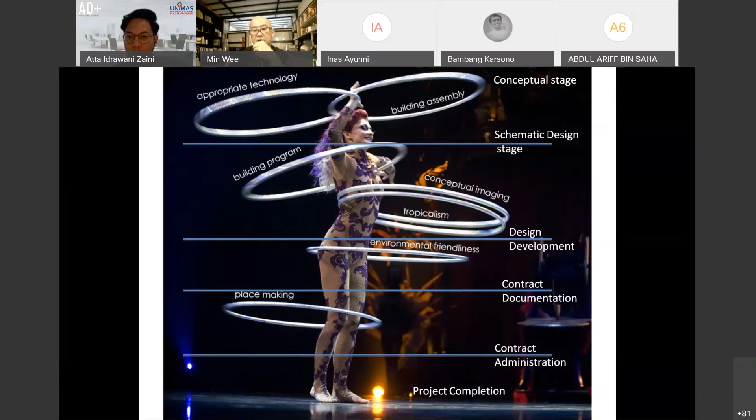I thought that perhaps today I'll talk about just four of these preoccupations that I have, so that they can maybe guide you guys in how you can talk about your design, how you can start, how you can develop, and how you can end, so that it becomes part of your project submission.

So maybe we talk about the first one, which is the threshold. Why is it important? It's a very strange thing to talk about, but I'm trying to relate this to our culture, being Asian and being in the tropics.

This is basically our culture, being in Asia. What we do is that when we enter a house, it's very normal for us to take off our shoes. That's something local to us, unique to us, part of our culture. The raised doorstep in a Chinese building is also part of the culture. So one is physical, the raised doorstep - the other one is cultural, it's social. You don't see it, you hear of it, you practice it. But we can use it to delineate between the inside and the outside.

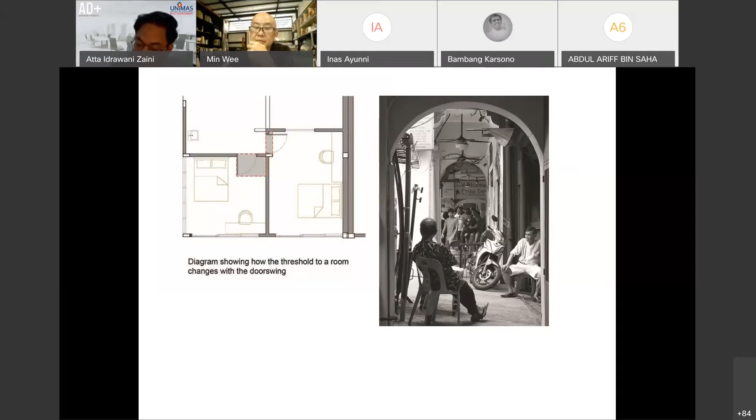So I use this building as an example of what a threshold could potentially do to a building. This is a building restored by us. It was built in 1963 and served as a municipal council for many years. Then in 2004, we were told to change it into a little museum on the first floor and to have shops on the ground floor.

Those of you from Sibu will be familiar with this project. When we did it, we also did a diagram. This is like the kind of stuff that you guys in second year and third year do - a site forces diagram. You look at site forces. You see the red square there - that's where the building is.

Then you notice they've got two important streets, one on the top, one at the bottom. So this building doesn't really have an entrance because all the development in the area has taken away that sense of entry. It used to be from the north, where the multi-story car park is, but someone from the authorities decided to put a multi-story car park there, which took away the sense of entry for that building.

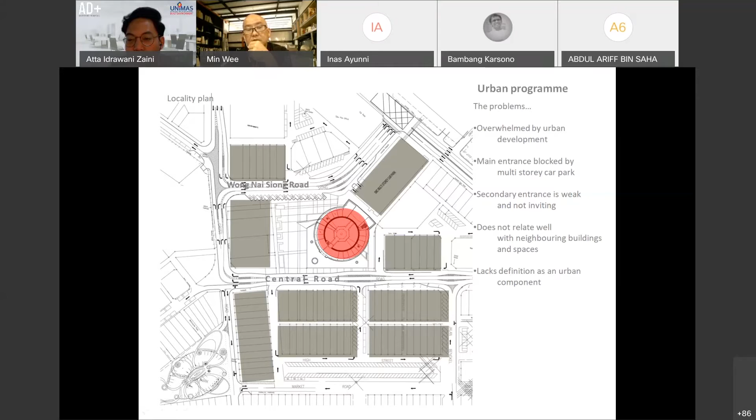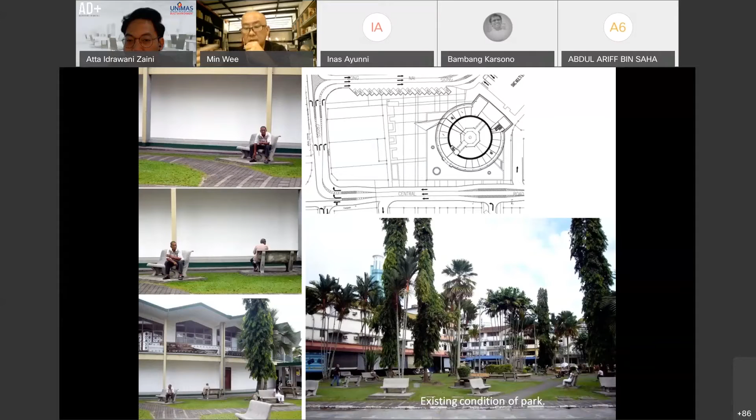So we needed to create another one. We asked the council, can we use the park as part of this entry space to create a forecourt? Essentially it's creating a threshold from the street before they enter the building. It's a preparatory space that prepares you for visiting the museum. It also enables us to define the edge of that building.

You see the red square that's around it now? That basically defines the compound of this heritage center. So whether you're coming up from Wong Nai Siong Road or from Central Road, whether on foot, by car or by taxi, you enter the threshold first. The threshold is the green space, the park that we've taken over. It prepares you, it tells you that you're going to see something interesting, then it tells you where to enter the building.

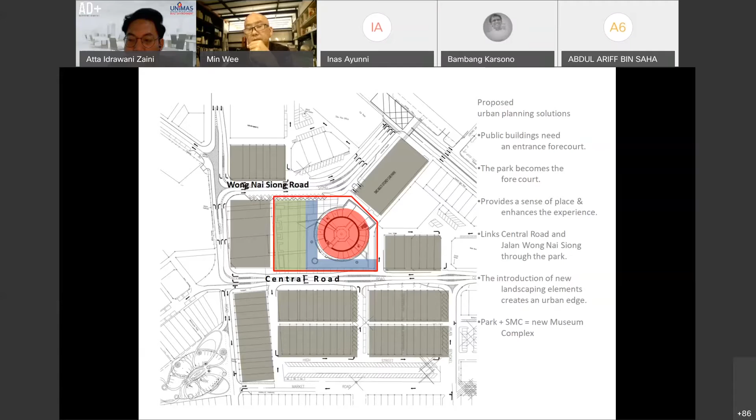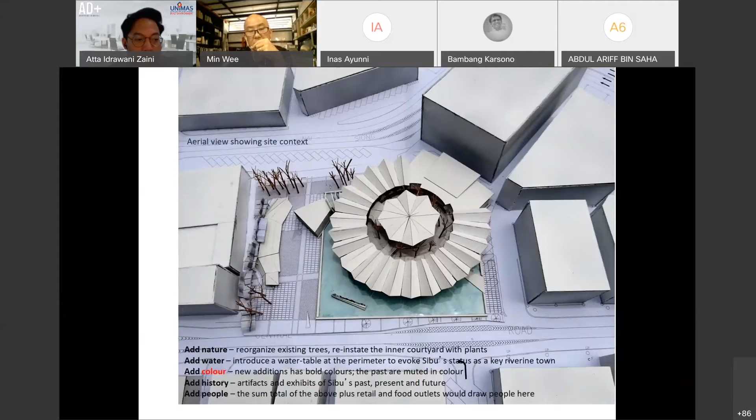Now, because this is a circular building, it makes it quite hard to tell people exactly where to come in. So when we presented this scheme to the mayor in Sibu, we told him we're going to design a big funnel that sucks people into the center of the building. I think when we were presenting, he thought we were speaking as a metaphor, maybe some sort of electrical device. He didn't think we were going to design something that is physically a funnel that sucks people in. But that's what we had in mind all along.

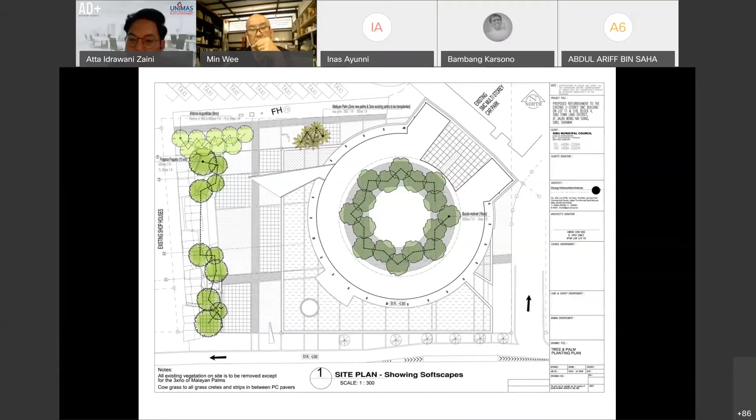So this funnel was an intervention into the existing fabric of the building. We also put a water body around this circular building. What does this do? It basically allows us to control how people come in and out. Because there's water here, you cannot simply go wherever you want - you have to come through the park and then enter through the pool. So the water becomes a device to enrich the space, and it's also a device for traffic flow.

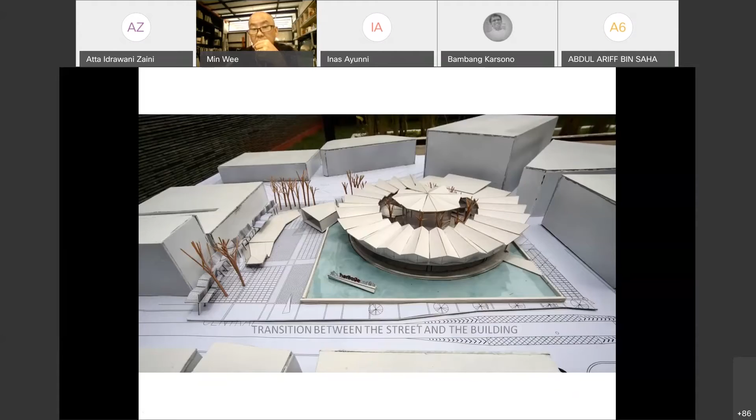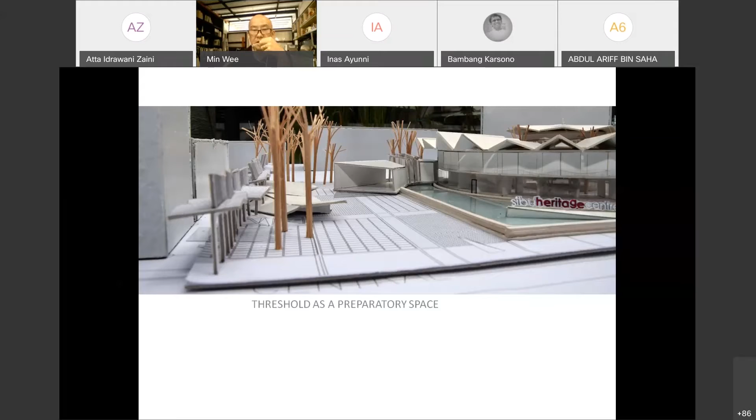So we make these models routinely in our studio. Some of you in year one, we talked about the idea of a sketch model - this is an example of a sketch model that real-life architects do. We build this, take it apart, and change it. It's not very pretty, but it's to scale, and it's useful for us to get a sense of space and how things sit together.

So when you look at this now, eventually you see how it gets built. You can see the funnel transforming the look of the entire complex. Instead of a circular building sitting quite lonely in a park that's not related to it, now there is some symbiosis in how the building should be entered. You get off, you walk through the park, and you enter this threshold - this big funnel that basically guides people in.

Now the threshold, the funnel we designed, isn't simply some funky thing to look cool. We picked up clues from Sibu as a town. Sibu is a shipping town, a riverine town with life around the river. It's also a town built on timber logging, so we wanted to clad it in timber. We wanted to allude to the jetties, like when you get in and out of a boat. So the inside of the funnel is a little bit like the ramp you use to get in and out of the ferry - rough timber planks that make you enter through the space.

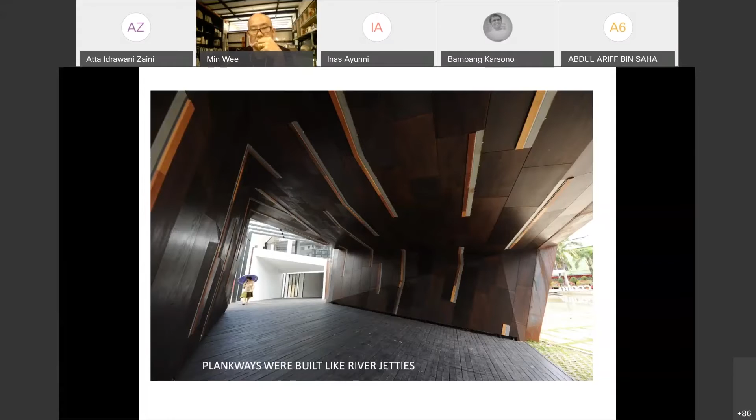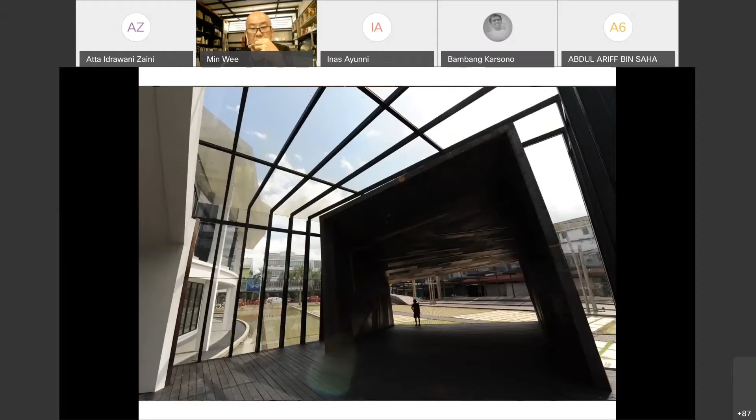You enter, then it sort of prepares you. You come in. The other thing about the threshold is that you can see from this photo that you're getting out of the heat before you enter into the aircon. There's this space that allows you to cool, allows the sweat to dry off a little bit, then allows you to get ready. Then you come in some more, and once you get through the funnel and enter into the building, you know that you are there inside the building.

This funnel is like a snake. It sort of insinuates itself, becomes a floor. It's also part of an exhibition space, allowing you little glimpses into the courtyard. You see how it pushes itself like an animal inside, then pushes all the way. The funnel ends in the tip, right in the middle of the building. Then from there you get out onto the upper floor.

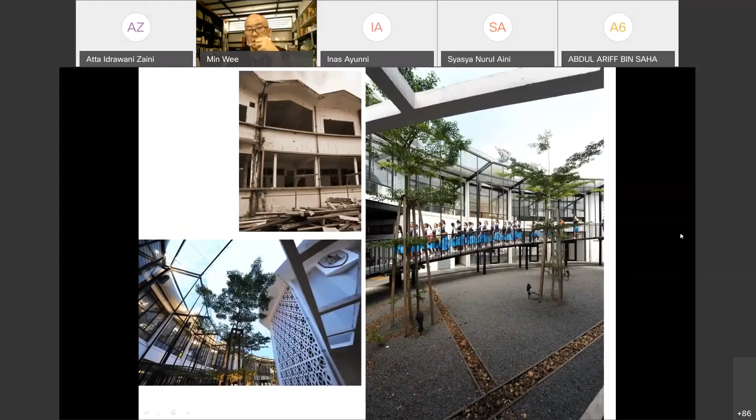This ramp is basically how you go up to the museum on the upper floor. So this is one example of a threshold. It's a bit elaborate — it takes a little bit more time to design, a little bit more people to consult, a little bit more money to construct. But sometimes it's in a very simple form.

Like for example, the entry into a house, which is also an office. You've got a door. Most of us have this — you have a door, but when you enter it, you muscle through and immediately you're in the house. So the inside and the outside is separated by this very small bit of brick wall and door, about 4 inches.

Whereas if you enlarge the process of entering, you stretch it a little bit — you enter, you see the water, which is actually free because it's collected from the roof. Then you have a bit of green, and then you enter the building. That sort of prepares you, gets you ready. You can see a little bit, gives you a clue as to what you are expecting inside. Then you enter through the door, and once you've entered, you know you've arrived because you are now inside. Whether there's aircon on or not, at least there is that process of entering.

It's not just a matter of like going to the bank, where you open the glass door that's only half an inch thick — one second you're outside, next second you're inside. The process of entering is not poetic, and neither is it very healthy.

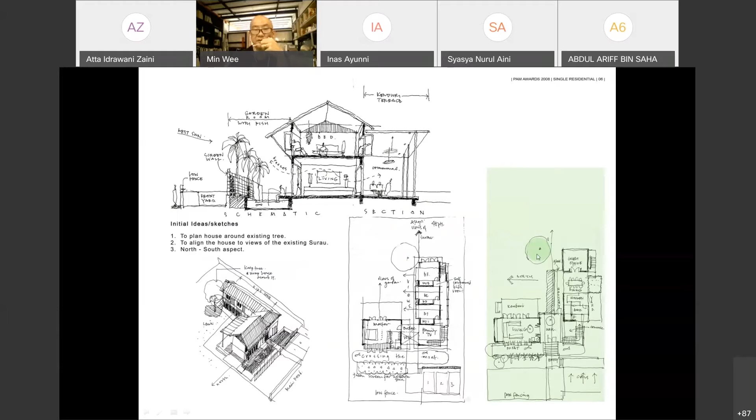It's got the kids on one wing and the parents on the other wing, organized around an L shape. The reason for the L shape is because there's an existing tree on the side, which we refused to cut. We decided to retain the tree. In fact, the clients wanted to cut the tree - we were the ones saying don't cut it, leave it.

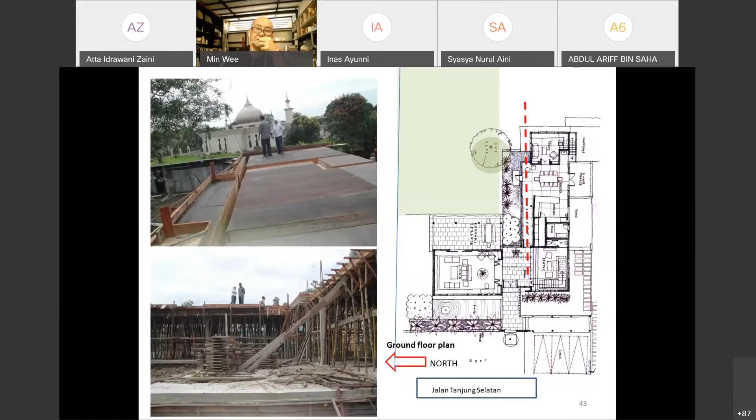So we had an agreement with the couple: we leave it until you're on the first floor, then you go have a look and see whether you're comfortable with it or not. So they looked at it, went up there, had a discussion. I left them alone, they talked about it, and then they decided that, okay, we can live with it. It's not too close to the house. They were worried about insects getting into the house.

But as you can see, there is no such issue. But the focus today is about shade, okay, it's not about the house. So let me just talk about shade.

You see this little sketch we did - it's actually part of the west wall. The front of the building faces west, and as you know, west sun comes down very low and it's very hot, usually at the end of the day when the house has already collected so much heat. So we thought we'd pull the roof down like a cap, like a baseball cap, along the west side, so that the master bedroom on the upper floor can have nicer windows. They can look out in the morning when it's not hot, but in the afternoon the roof protects the window from the heat.

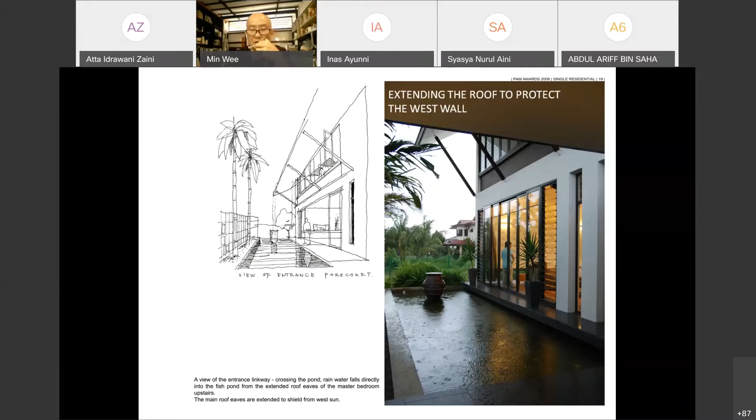And then again, we talked about threshold. This is another threshold where, entering the house, you go through this little water feature - it's a bonus, just collecting water from the rain, from the roof. This comes down and collects here. It doesn't cost a lot of money to construct because houses usually have ground beams around it anyway - I'm just lowering the slab so it collects water instead of being an apron which doesn't collect water. So you see the entry there.

So in this little photograph, you see an example of two design preoccupations already. One is about shade. The other was about the notion of the threshold, about preparatory space before you enter a house.

And shade is important - this one is shading against the west sun. This one is what we call the Kenduri Terrace. It's an extension of the living room where on Fridays, members of the local surau come over and share lunch, so that space becomes a dining space for that short period of time.

Okay, so these are just very simple examples of how, as year 2, year 3 students, when you're designing structures, the pitch roof is not to be frowned upon. The pitch roof over the flat roof any day, because pitch roofs have got two qualities that a flat roof cannot provide. One is that it provides overhang.

A pitch roof provides overhang on both sides of your building. It shades the wall, and when it shades the wall, it protects it against deterioration.

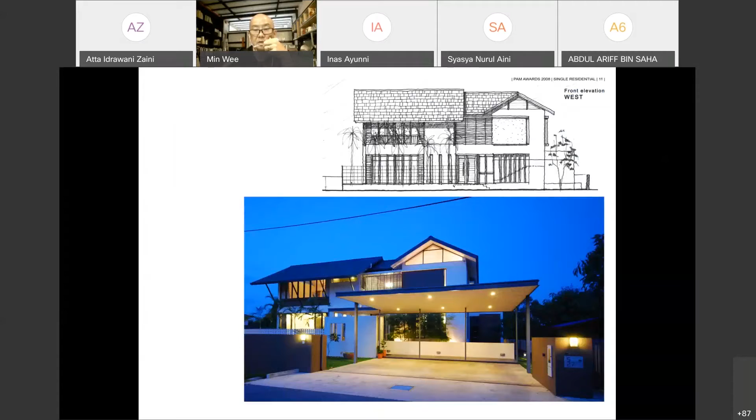If you look at the corridor space just now, I'll go back a few slides. You see how the sloping ceiling continues? So your ceilings are never flat, it follows the pitch of the roof. So tall rooms mean more cooling. The hot air has a chance to rise, so that when you're sitting down on a chair on the floor, it's not so hot. Whereas if it's a flat ceiling, you don't have that opportunity.

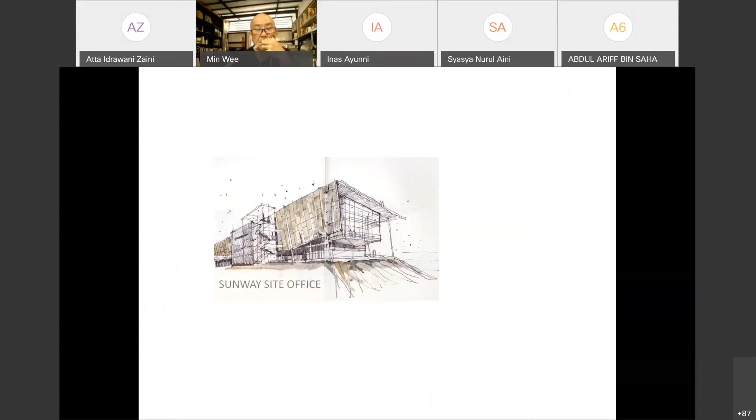Okay, the second one is it's not a house, it's a site office. This one you can't visit, you need to travel to visit this one. This one is in Johor, it's on the causeway, it overlooks Singapore. We were told to do it with a very quick construction period.

This is potentially another subject we can talk about, which is appropriate technology, about building something that is temporary. It's a temporary building, so that's why we built it in steel, so that it's fast, so it can be taken apart and taken away after the end of the project.

But it's quite a big site office, and we wanted it to look towards the causeway because you can see Singapore beyond. It's quite a nice view. It sits on top of a hill.

So we designed a very simple structure that is based on a module, as you can see. If you look at the section below, you see everything is a module. It's basically a little square, which is about, I think, 6 meters by a certain number, I can't remember. Then we put a big roof over it, very straightforward.

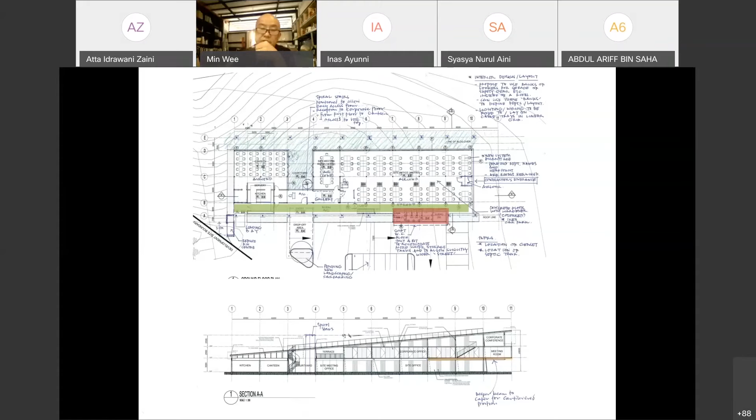Again, another sketch model, and these are sketch models. They are not pretty, but they tell the story. They sort of enable us to explain the structure to the engineer. We did it without the roof, you see, so they can look at it and understand roughly how we're going to span it and things like that.

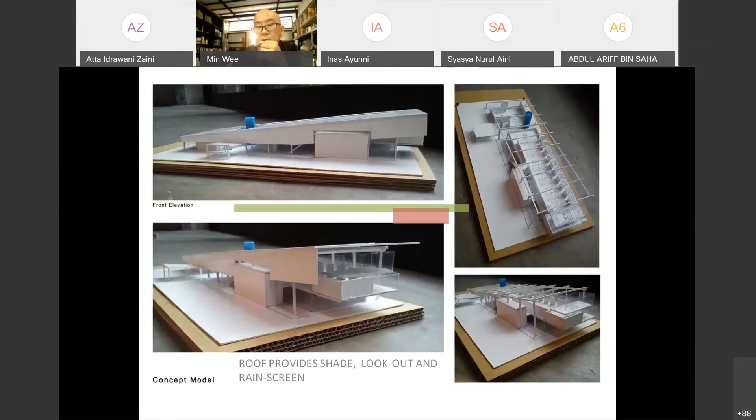We thought the roof should do more than just protect. We thought that maybe you can walk on the roof because it's a lookout. Then you can walk up to the top of the roof, and you can stand there and look at Johor on your right, then look at Singapore on your left. I thought it's kind of cool. So we proposed that to the client, and that's the construction.

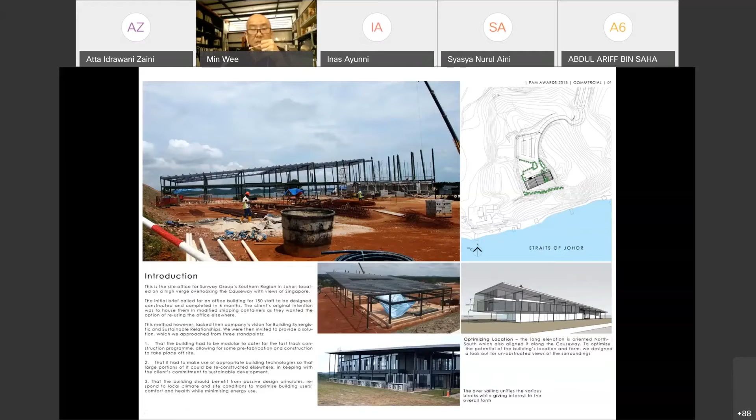This is a little report that we prepared for a publication, but I thought it shows a lot of the construction photographs that might be useful for those of you doing building construction and building technology. If you look closely, you'll see that all the steel joints are bolted, not welded. This is to enable the structure to be taken apart, so you don't have to cut, you just have to unbolt. It makes it a bit harder at the beginning, but it's basically another form of sustainability.

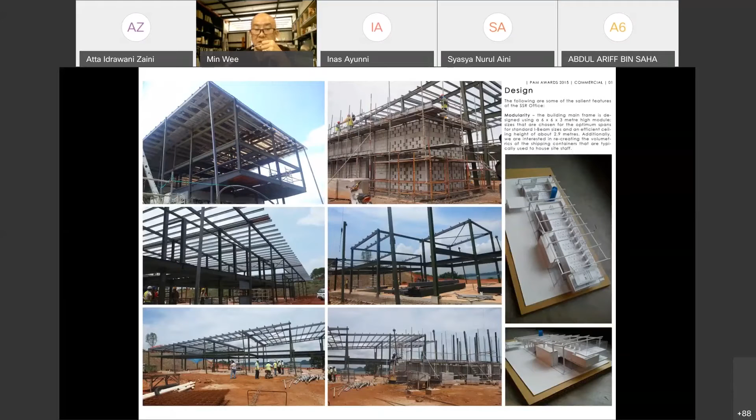It means you can reuse it. Okay, and the floor plans are very simple. It's this notion of served and servant spaces, hardworking spaces and spaces that are being served.

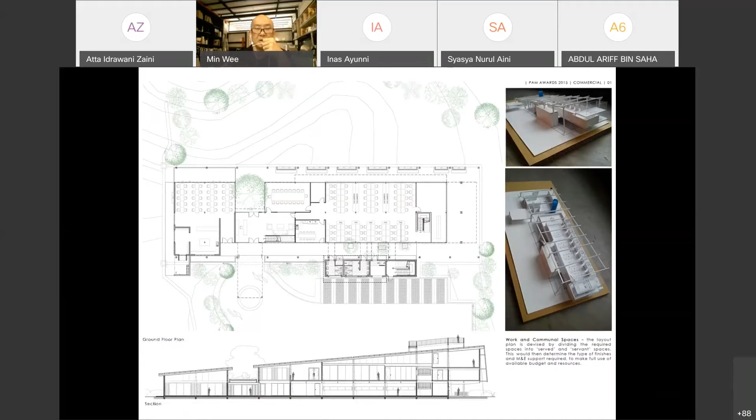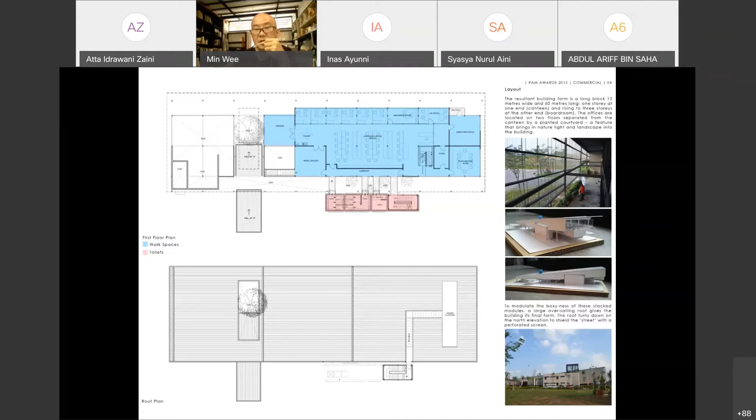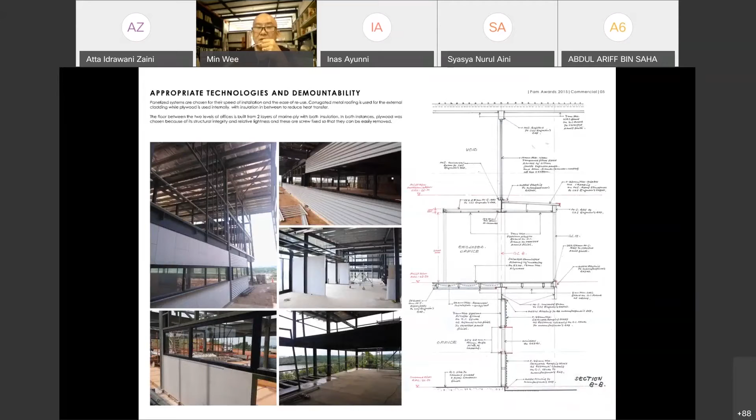You see the photograph on the right with the wall that is almost translucent. That wall is actually part of the roof that we turn down, the same type of steel roofing that protects you from the rain and the sun. Then we turn it down and it becomes a screen. What does that screen do? It's the same steel roofing, but it's got holes punched in it, so it allows the wind to get through and to breathe. So when you're going outside of the building, it becomes another threshold, so two things are starting to work together, the idea of the shade and the threshold.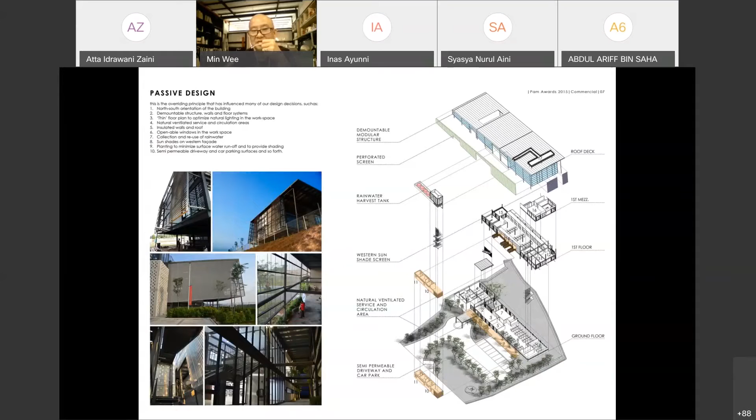I chose this slide because I thought maybe year 3, year 2 students, exploded axonometrics are underrated. You guys should use it more often to explain your scheme. It's a very good way of summarizing your idea. So when it's finished, it looks like that.

Way beyond in that little green part there, that's Singapore. And we are looking at it from Johor.

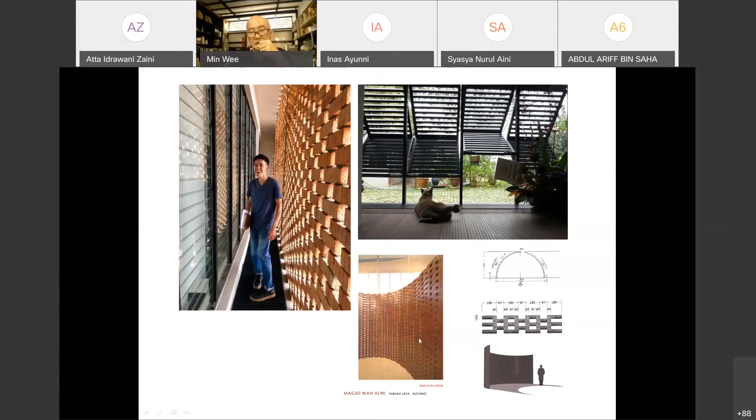I want to talk about permeability. Permeability is to do with cross ventilation. Okay, these are examples of permeability. Windows that open, structures that open and allow air to come through, furniture like this wall that allows air to come through. These are all examples of permeability.

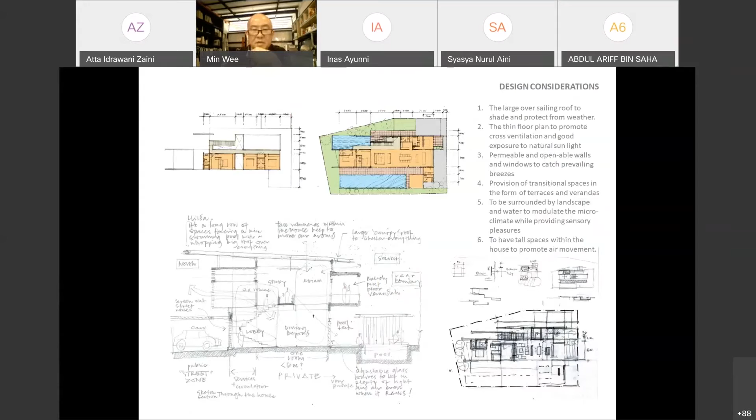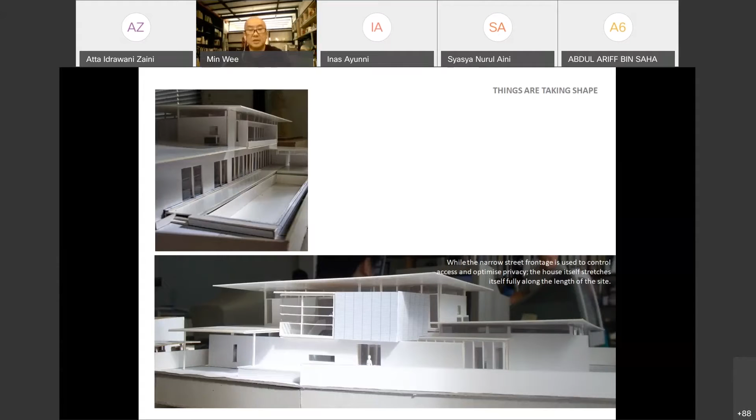Sometimes permeability has to do with planning. It's got to do with this, like I'll show you this floor plan. It's got to do with very permeable spaces, spaces that are very skinny, floor plans that are very skinny. You open this door, you open the window on the other side, and the wind can pass through.

So again, the notion of shade, you can see from the big roof, the idea of the threshold, entering the building, and walls that are permeable. These are glass louvers that you can open and shut. If it's raining, you shut it. If it's not raining, you open it. If it's really, really hot, you open it really, really big. It allows air to get through the house.

And if you look at this next slide, you see how skinny the floor plan is. This is actually the width of a room, about 4.5 meters. It's got louvers on one side, and it's got the pool on the other side. So if the wind is blowing from the pool towards the house, you can imagine it brings a little bit of cool and moisture into the house. So it's cooling. That's another way of being permeable.

It doesn't have to have just lobang. Sometimes it's just skinny. You allow the house to breathe from left to right. So it makes it permeable.

This is a little project that we did again in Johor. I'll tell a little story. It's linked a little bit to something else that I'm fond of, which is adaptive reuse. Adaptive reuse means taking an old structure or building and finding new usage for it.

So we were doing a slightly bigger project here, and they looked at the guardhouse and said, 'Look, can you guys help us redo the guardhouse because the old one looks a bit dated, looks a bit tired.' So the brief was to actually take this whole thing down, pull it down, then do a new one. And because we are Sarawakians, we're a little bit more aware that things are hard to come by, it's not like simply you want to push it over, you push it over and do a new one. It takes more money.

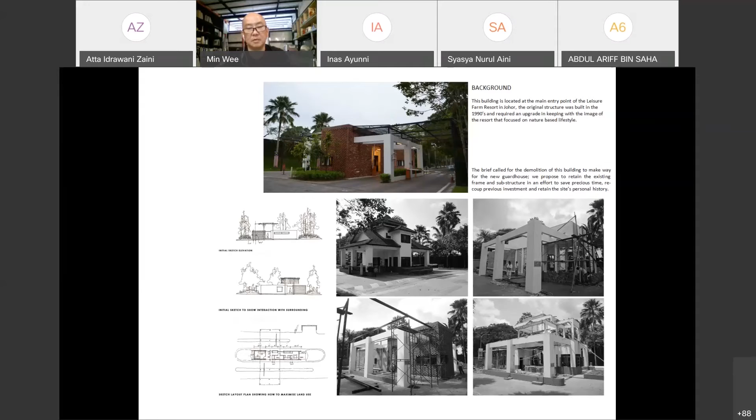And also someone in the past 20 years ago spent time and drew this up, designed it, an engineer designed the structure, M&E guys put in the lighting. Someone invested time and effort. So we thought it was a bit rude to just simply push it over. So we said, can we keep the structure? We keep the structure and then we see whether we can use the structure to re-devise the function of this guardhouse. So that's what we did.

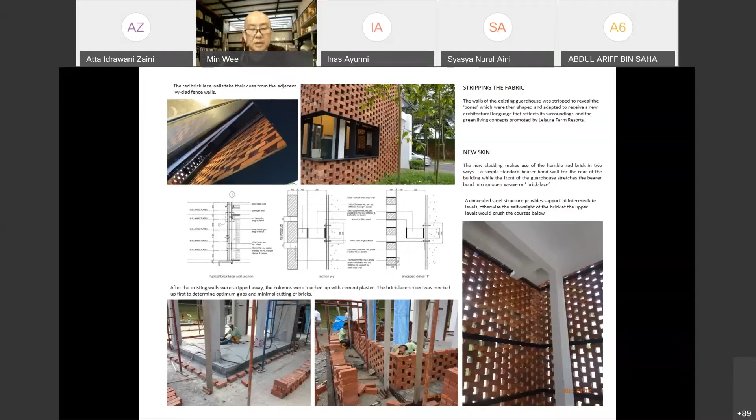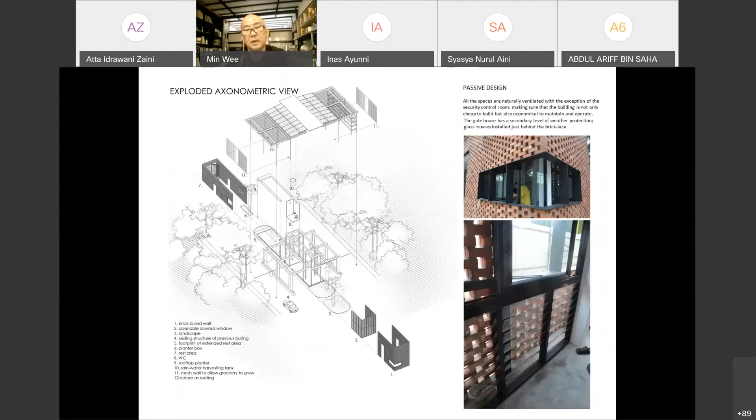We kept all the concrete structures and then we basically clad it with this layer of brick that is not your normal brick wall. We call it brick lace because it's not rapat - actually, it's pulled apart so that air passes through it. And then behind, in some of the rooms, we've got another layer of glass so that you can protect the room when it rains, if you need to. But otherwise, the rest of the building is where it needs to be open, it's open. Where it needs to be closed, it's closed. Where it needs to breathe, it breathes. So again, what that means is that you reduce your air conditioning cost.

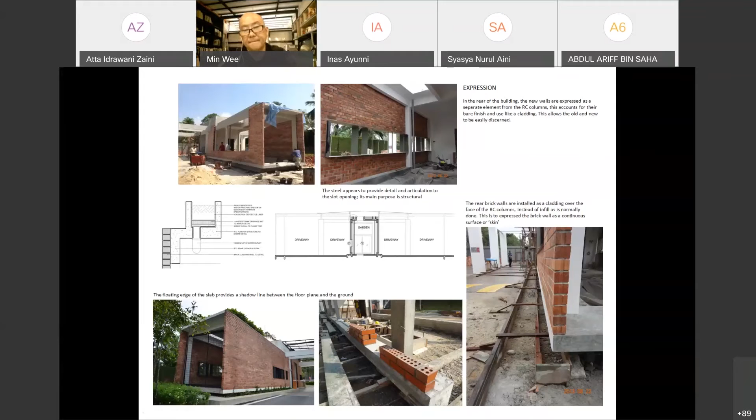Again, these are construction photographs. I wanted to highlight one thing. You see this big steel box there? That is for the window opening. You guys who did building structures would know that on top of an opening, you always need to have a lintel. You don't see a lintel here, you see? That's because if you look at this steel frame, you see the fins there? Those fins act like mini columns to support the lintel, which is just this very flat piece of steel. So it basically props it up along the way and enables that steel box to carry those layers of brickwork above. So it's just a little bit of detailing here.

And that's the final outcome.

The existing structure was retained, the roof and all that was taken away, and then we gave it a bit of new life, which is something we're quite proud of - to basically spend less, use less, to do more. And then sometimes it's a bit low tech, you know, you just have walls that open and shut. If it rains, you shut it.

This is in a masjid. Then if it is hot, you want the breeze to come through, the rain is past, you open it, and then you can breathe. So all quite straightforward. Doesn't have to be motorized. It's just, you know, you just get some guy to open it now.

Okay, this is the last chapter. This one is something I'm particularly fond of, like building things and putting things together. I want to finish here quite quickly because we are linking you guys later on to a house. I've got someone on standby with a camera. We're going to visit a house that we just recently completed, so maybe we can see whether there are lessons from here that we've been talking about, that was demonstrated and built in that house.

This is a definition of materiality. Essentially, it is about using materials in their original form, to show them off in its original form, not to have wood pretend to be steel or steel pretend to be something else, but to use it in its natural form.

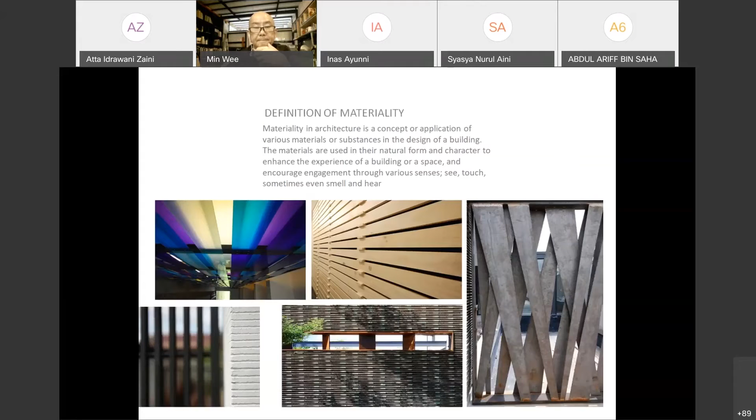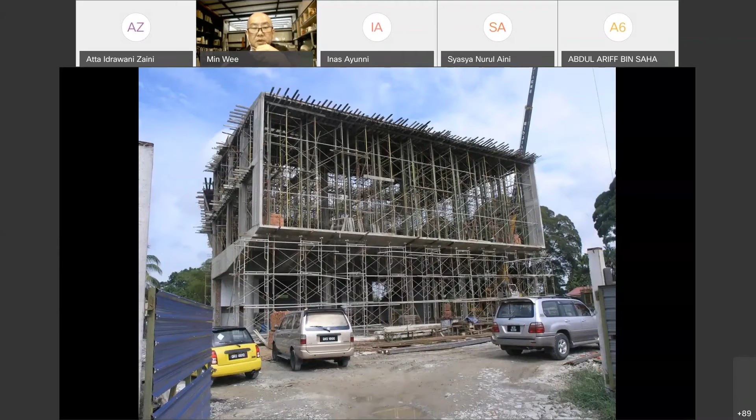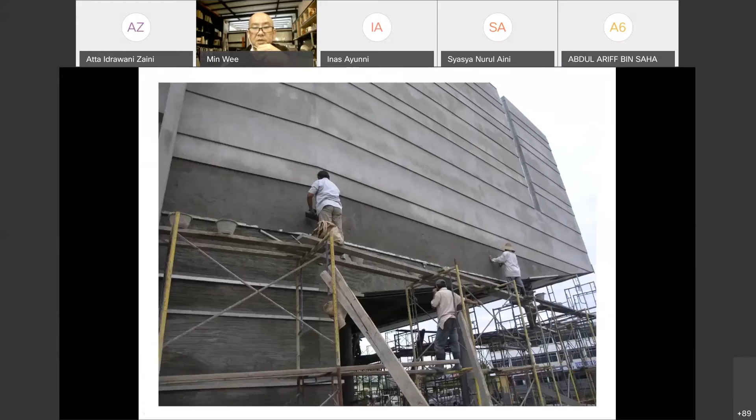Example - this building, you guys probably know, those of you from Kuching, know that this is the gym building along Rock Road. What I wanted to show here is just a simple thing that we did with the external plastering. Instead of using groove lines to break up that big space, we actually did it in such a way that the plastering is like shiplap.

It's a little bit like weatherboards in an old house. And what that does is it actually takes the water away from the surface of the building. Groove lines will collect water, but this one will actually drive the water away, so it doesn't go moldy. And then where we need ventilation, like the staircases and toilets, we pick a material that is able to breathe.

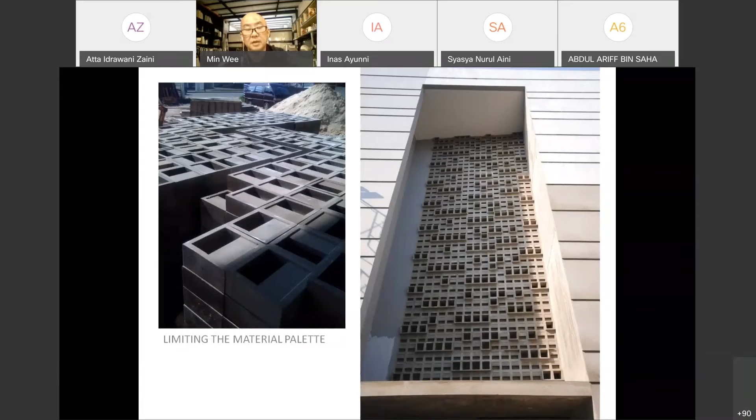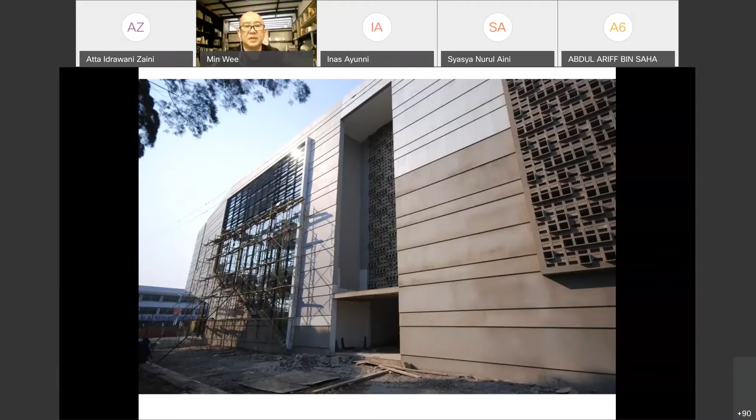These vent blocks are designed to breathe. They're called breeze blocks in America because they allow the breeze to come through. We use it for areas where you don't have windows - toilets, staircases - where it requires natural ventilation. So that's one idea about how you use very simple materials. This whole building was built using steel, glass, aluminium, and cement.

Now I talked about some of these design preoccupations. It has to do with us as a person, about us growing up. What did you go through when you were growing up? If you grew up in the kampong, I think your preoccupations would be very different from if you grew up in a condominium, 22 stories up in the air.

This is my childhood. We grew up in an old house where family members are constantly making furniture out of recycled timber. So that's something we sort of cultivate in our children. When they wanted a bed, instead of buying one, we joined two doors together and put wheels on it, so then it becomes a bed. Until she can afford to buy her own bed, this is her bed now.

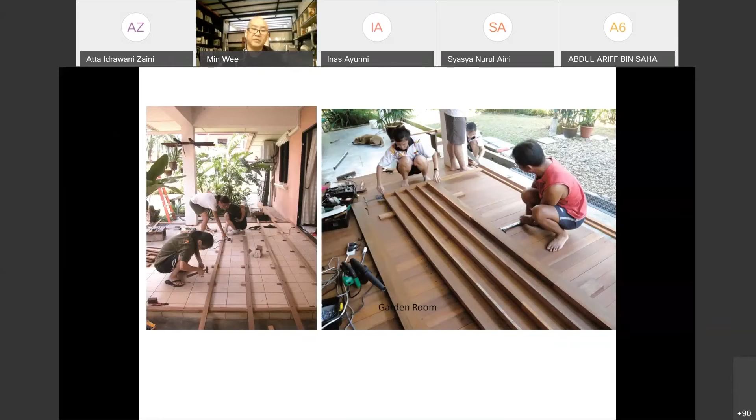That's the kind of attitude we try to cultivate in the interns in our office as well. So whenever we get a chance, we get them to work with our friends, work with our clients to build things with our own hands. We design, we also build.

So this one is very simple, it's just basically putting in a timber floor. Some of you have done it before, some of you have never seen this before. And that's why working in a group is good, because one person learns from the other. They don't learn from me, they actually learn through me. I put these people together and they learn off each other.

So the lesson here is this: how do you span such a big space using just the same profile of timber? It's just basically a board this wide. So how do you span it? Essentially what we did, if you look at the last slide, is combine the floorboards with one standing up on top. So every small piece of floor becomes a little beam, then you join all the beams together, and it becomes the bench.

If you look underneath this bench, you see it's got a small beam, because things take more weight when you stand them upright like that, rather than flat. So you combine the two: one is for sitting on, one is for the support.

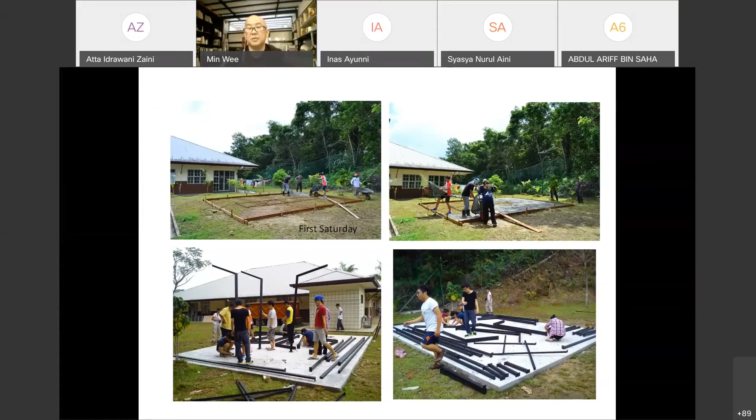Very simple lesson. This is another simple lesson, about mobility. This is a rural site, an old folks' home. They wanted a shed to plant orchids. We knew we couldn't do welding up there because we didn't know how, so we got everything prefabricated and assembled with nuts and bolts. These are all students, over 2 Saturdays.

And then when it's all put up, you just brace it together with the cross members, and then it stands up, and then you plant orchids underneath.

Some of our clients are adventurous enough to involve us in small extensions to their house, and they know we use students. We have students do the drawings, the explorations, the testing. So much so that the contractors also have that spirit - they would do prototyping with us.

So if you look at this photograph, essentially we came up with a drawing of these steps, and we wanted the client to feel safe using it. In our year 1 class we talk about prototyping of the seats they're designing. We also do prototyping - the contractor did one out of plywood. You see Yasmin here trying it out, to see whether the steps are too high, whether they're high enough.

Are they a bit scary coming down? Do I need two handrails on each side? That's all part of prototyping. So we do it out of a cheap material before we do it out of the expensive material, such as steel.

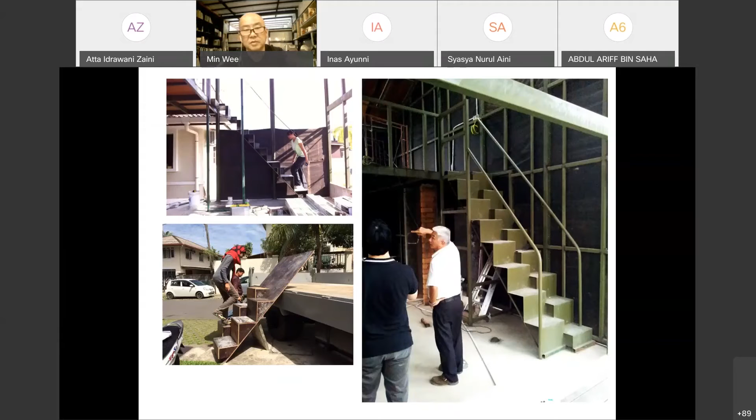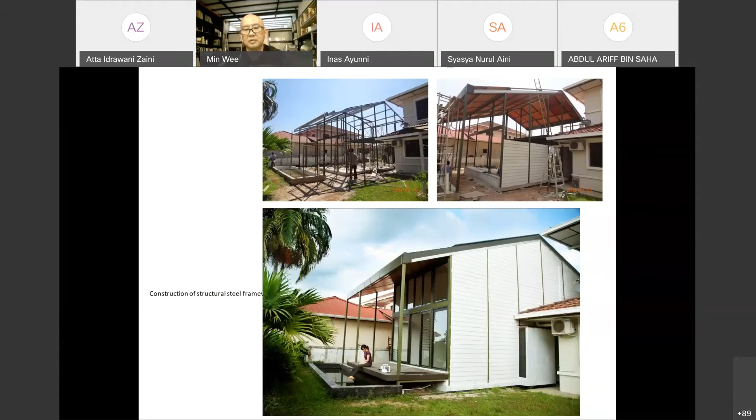And this becomes not just a project for us, it becomes a vehicle for students to learn simple things about how you need to conceal services in the walls, how you need to weld things together. If you look at the bottom photograph, you learn about ergonomics - simple things about how you need to chamfer that edge so that when you come down the stairs and go around, you don't scrape your chin. It's just small details that teach us as a group how to improve our skill.

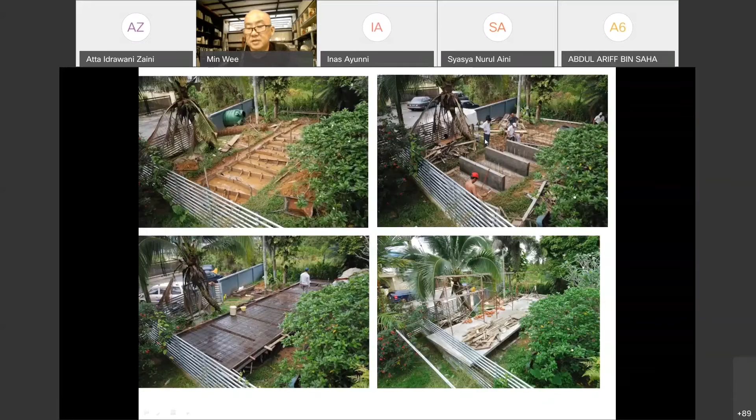So sometimes we run out of projects to do, so I thought of doing this illegal structure in my garden. At that time we had a student staying with us, so every morning she would climb onto the roof of my house and take progress photographs. She works with another young lady who was also in the office then. And the beauty of it was that the man in white standing with his hands on his hips is the father of that student. So the daughter designed the building with me, and the father built it with her. I thought that was kind of nice.

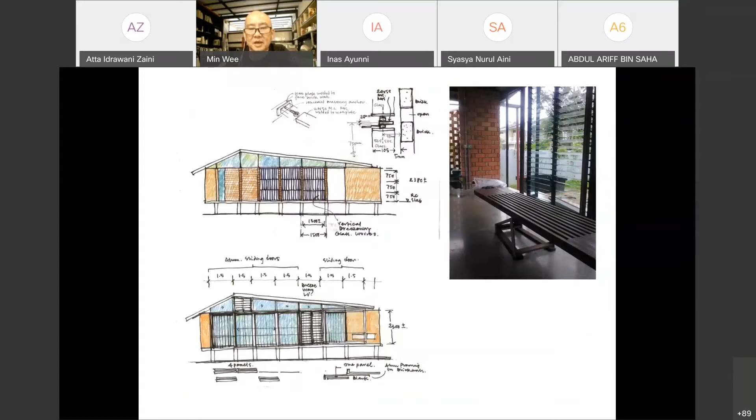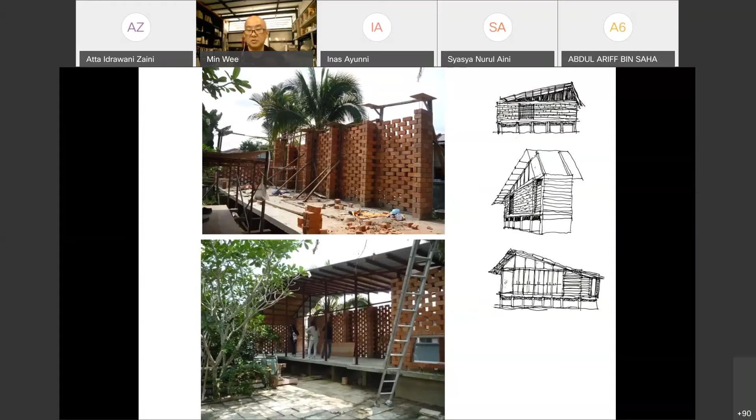So it's a very simple structure. I wanted to demonstrate the qualities of brick, a very simple material, showing how I can use brick as an enclosure and also as structure. You see the tiangs are actually done using brick - on one side is brick, on the other side is steel, just to balance. So that if students visit, they understand you can use two materials concurrently, like a hybrid, to support a very simple structure.

And again, this is all nut and bolt, so you can take it apart if you want to. This kind of construction makes you think a bit harder about the joints, because you have to plan everything a bit more carefully.

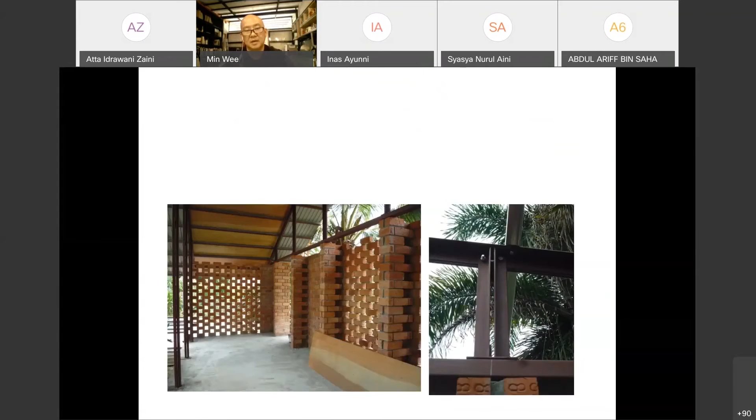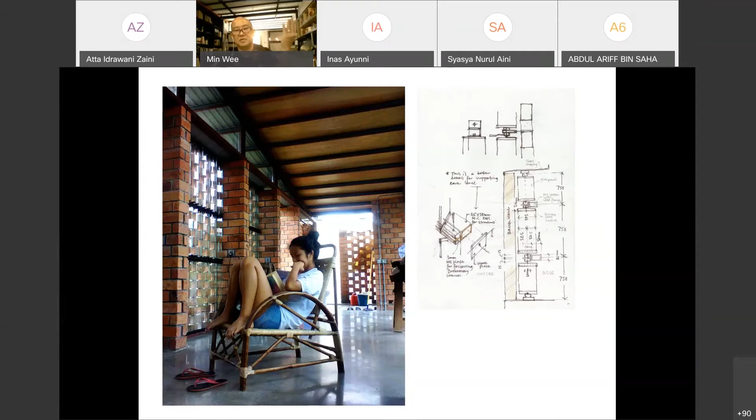And the final result is like that. See, again, about permeability. You see about how the louvers, they keep the rain out if it rains, but if there's no rain, then you just have it open, the breeze moves through the space.

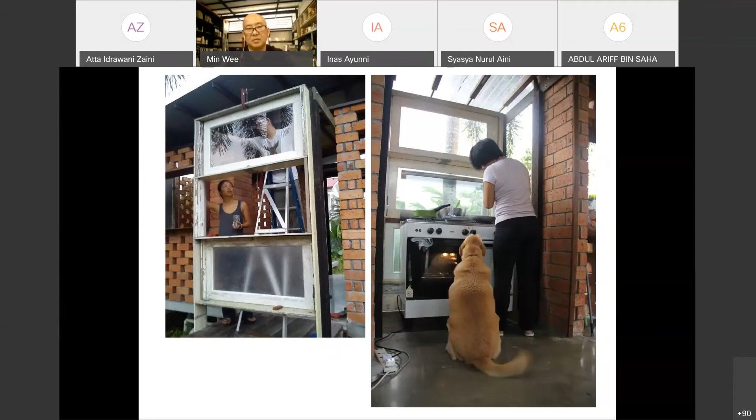Parts of it we built ourselves. This is the kitchen, we used recycled windows to build this little kitchen that has an oven, and we cook. It can take a lot of people, like during birthdays and all. During MCO, it became my office. So as you can see, it's actually a very simple structure, but it's got lots to say. If you visit, then there's a lot of things that you can look at and try to understand.